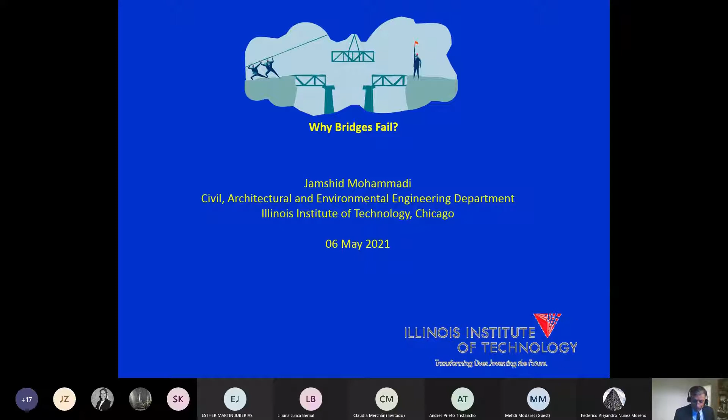So today I'd like to talk about a topic on bridges, and it's actually a down-to-earth type of talk. It's not very scientific, simply I just want to say why bridges fail. Most of this is based on my own observation and research with my students or even myself. So please feel free to comment and ask questions.

Bridges come in many types and forms and make up important components of the built environment and infrastructure system. I'd like to touch upon an overview of different types of bridges in the US, and the types of bridges we use here, based on some studies I did with Federico for Colombian bridges, are a little bit different. There are some commonalities, but some are different. So I thought it would be good if I introduced the different types of bridges in the US, talked about some reasons why bridges fail, went over some examples of bridge failure, and explained methods used to prolong the life of bridges. These are pretty much the contents of my talk.

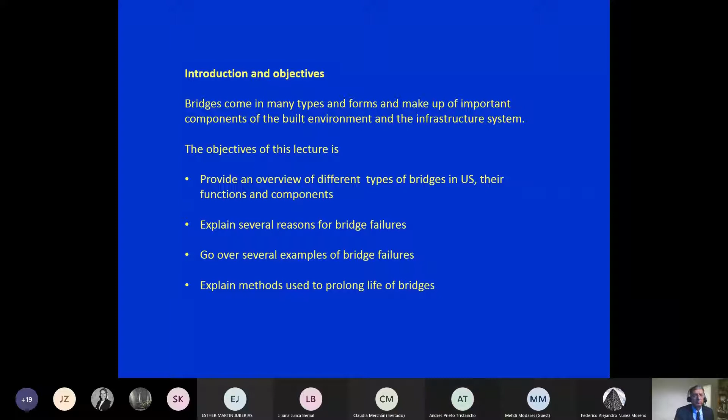When you look at the infrastructure system as a whole, you will notice that under that I put structural systems, environmental systems, and transportation systems. Then you notice that bridges would appear in those red boxes in two places. They appear under a structural system, and they also appear under transportation system. Of course, we know that bridges offer public and private users the level of comfort and operational safety needed to meet the overall objective of the transportation network. When you look at a bridge as a structural system, then it comes under structural systems. However, when you look at it at the network level, then it comes under transportation systems. Of course, the two lower red boxes you see are related to each other, but each has its own area of research and investigation in terms of reliability and also contribution to the infrastructure sector.

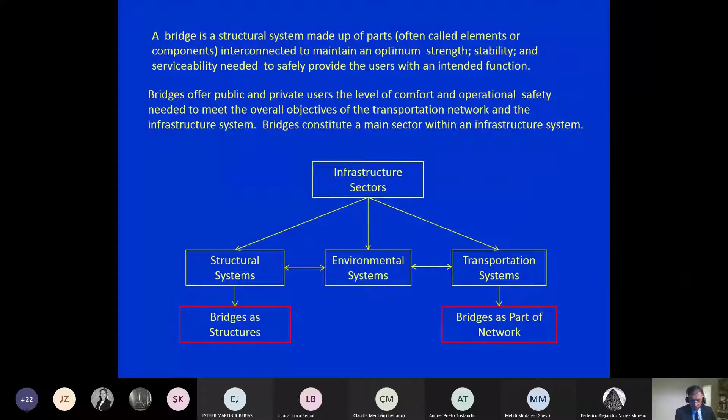So what are the types of bridges in the US? That's a good question. You ask people, and although they think it's a simple question, many people simply cannot answer it. So I decided to come up with an answer: what are the different types of bridges? In a broad sense, they are links in the roadway and railway system to allow traffic.

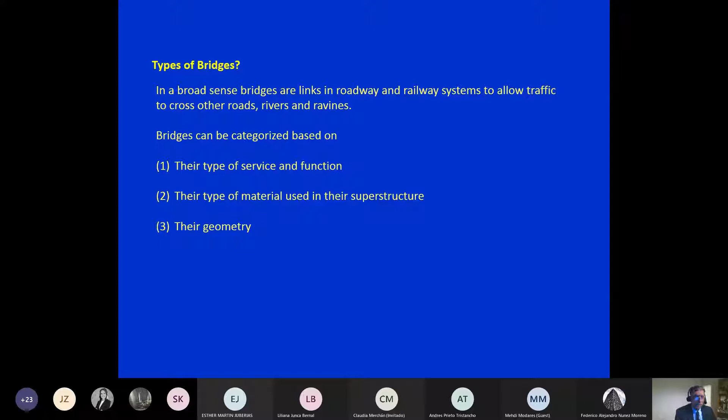Based on that, you can categorize bridges: one, based on their type of service and function; two, based on the type of material used primarily in their superstructure; and finally, based on their geometry. So let's look at some of these.

In terms of service and function, in the US we categorize them as highway bridges and railroad bridges, which are pretty universal. Pedestrian and bicycle bridges we call footbridges. Movable bridges may not be familiar to a lot of people. And in terms of other functions, a bridge may be used for a major oil or water pipe, or bridges used in airports.

So here are a few examples. The lower figure to the left is a railroad bridge, a typical US truss bridge. To the right you find a modern concrete bridge, which doesn't have much in terms of aesthetics and architecture — very common in the US, very flat type of pre-stressed concrete. But at this point we categorize it in terms of the network, so that would be a highway bridge.

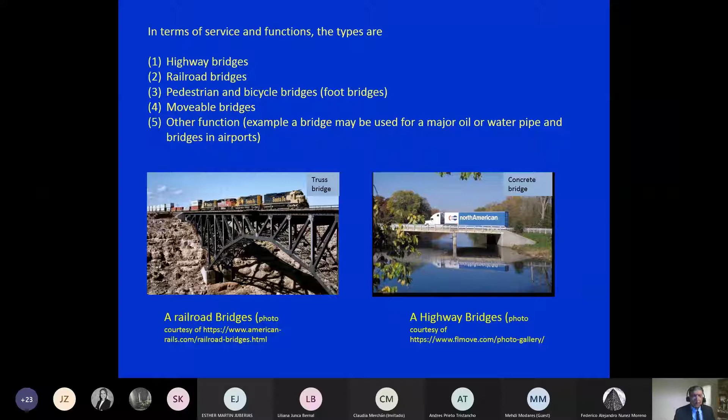To the left is a cable bridge, used as a bicycle or pedestrian bridge. And to the right is a bridge used in an airport. So these are some examples in terms of application or use.

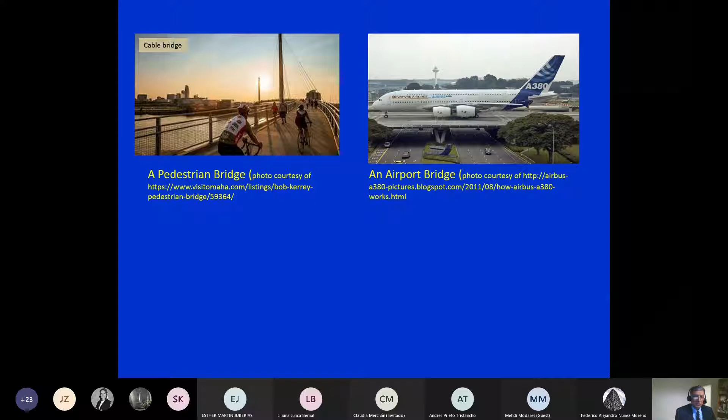Based on the materials, that's a little bit more known to us. However, we have to be careful when we say materials, because the bridge may not be entirely made of the same material — at least a lot of them in the US are like that. So we are referring to the superstructure.

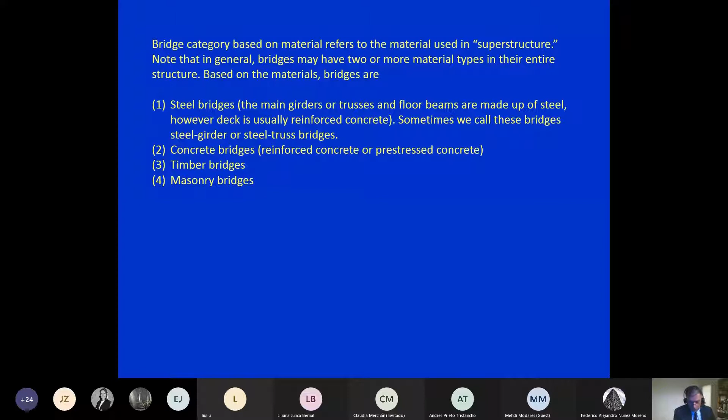In that case, we have steel bridges, and again we're talking about the main girder, because a lot of steel bridges referred to in the US are made with a reinforced concrete deck part — we are talking about the girder part. That could be a truss, or it could be a girder, a plate girder, or a standard W section or things like that. Then concrete bridges are either reinforced or entirely pre-stressed. We have a whole bunch of timber bridges in the US, and we still have a few masonry ones. So these are the material types.

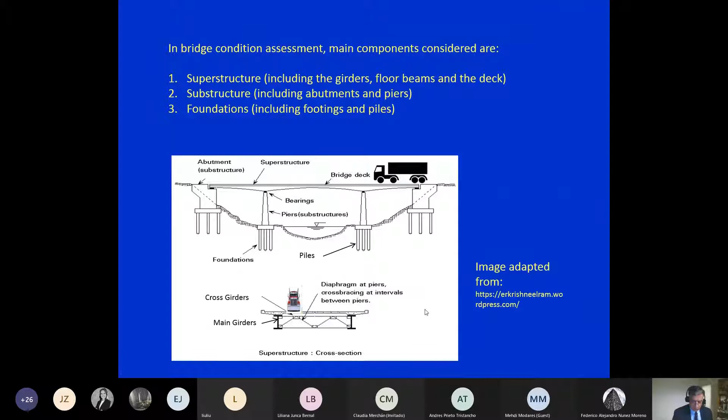So when you look at the longitudinal detail of a bridge, you see those components explained here. And lower you have the cross-section of the superstructure. So I thought this would be good to clarify before we continue.

Now, in terms of geometry, in the US we classify bridges as girder bridges, arch bridges, truss bridges, suspension bridges, cable-stayed bridges, floating bridges — that might be a little new to you. What are floating bridges? And another type that may be new to you, to our Colombian colleagues, is what we call covered bridges and timber bridges.

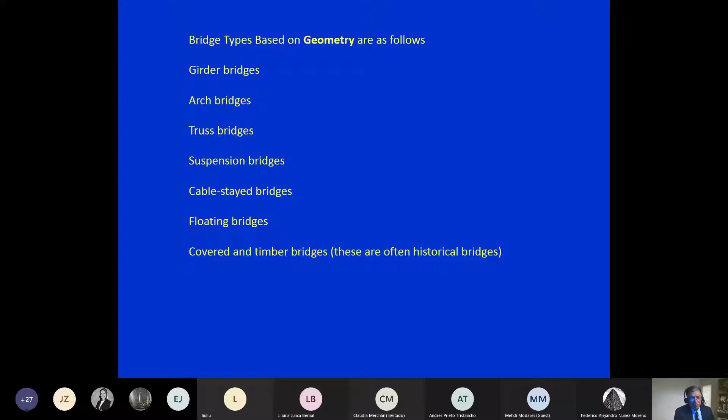Now, these are historical bridges. I'll show you some photos of those — they were primarily built in the Midwest area of the United States, in Indiana, in southern Illinois, around the 17th, 18th, even sometimes into the 19th century. Now they have a lot of historical value, and they are preserved because of that value.

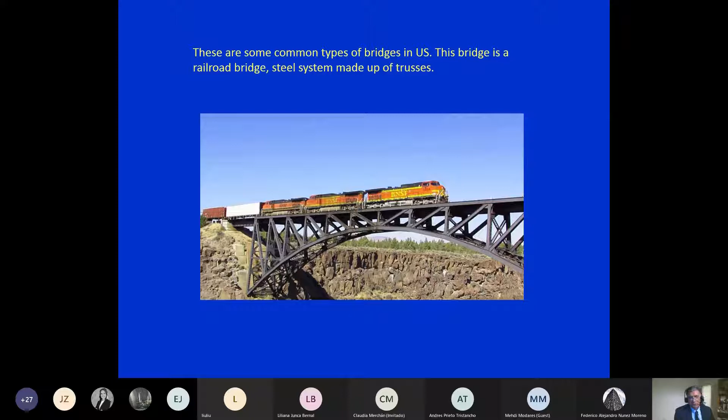So again, going back to the photo I showed you, now you see it's classified as a truss and also an arch bridge in this figure. It's a railroad bridge and also a steel bridge. So you can see it falls into different categories.

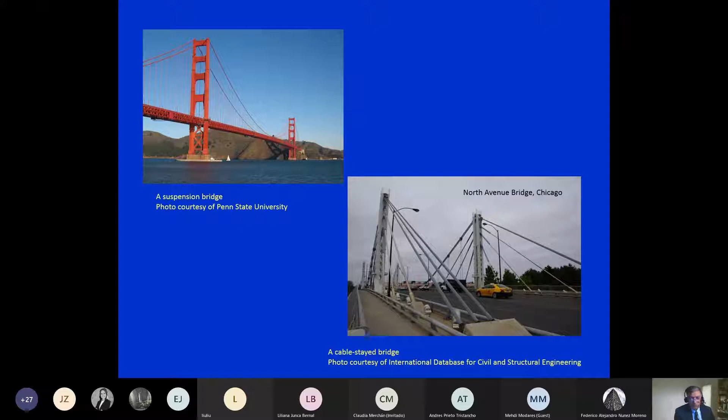Upper left, you find a suspension bridge, as you're familiar with. Lower right is a bridge in Chicago, on North Avenue, and this is brand new. I mean, brand new is about 6 years old, and it's a cable-stayed bridge.

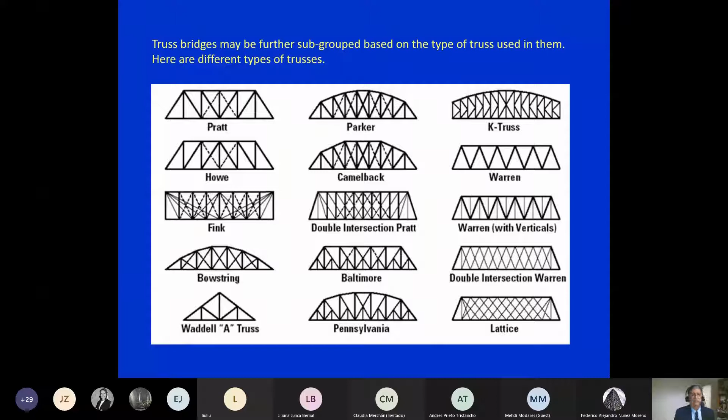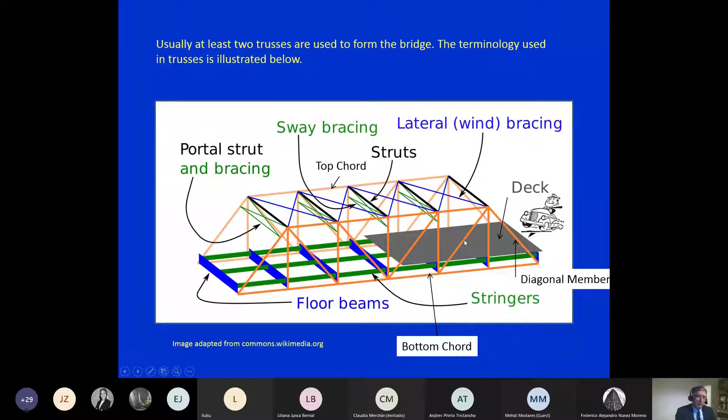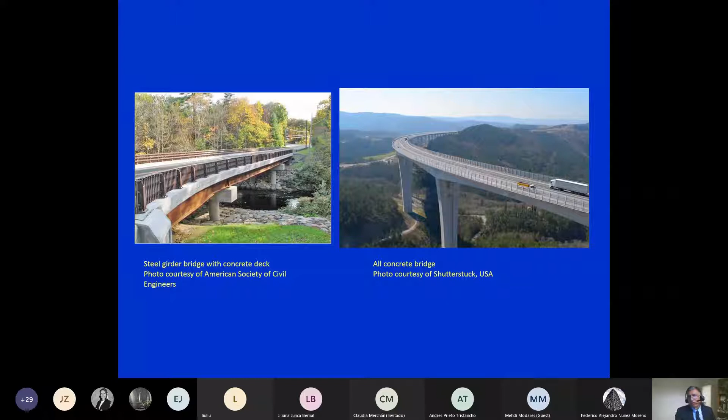Okay, so again, a couple more examples. I intentionally put the figure to the left. This looks like a concrete bridge, but in terms of category, we call it a steel bridge because of the steel girder. The one to the right is an all-concrete bridge, so that is definitely called a concrete bridge.

And these are so important in certain areas of Indiana and Illinois that people even have festivals in the fall semester called covered bridge festivals. So people gather and use these bridges, sometimes even using their old buggies and carts, horse-driven carts and things like that. And they are being preserved, and many of them are considered monuments that need to be protected.

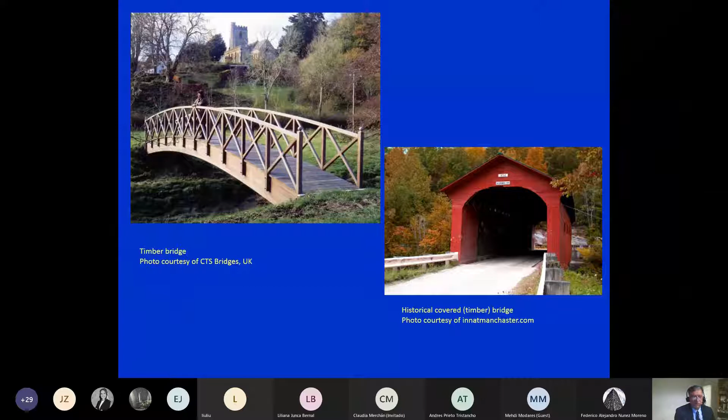So, you may be familiar with some of these bridges. These are stone bridges. Actually, Minnesota, in the US—these are arch bridges using masonry materials.

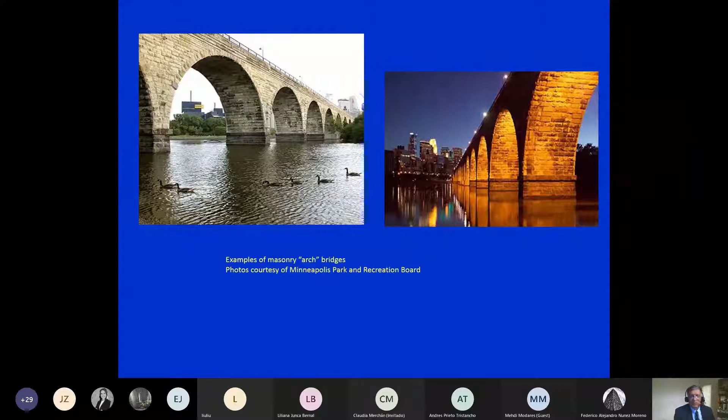Now, this is an interesting one. It's called a pontoon bridge, a floating bridge. And the concept is that you have a series of boxes, practically—you see those red boxes? They are floating, and the bridge deck is built over them. Now you drive over this bridge, you don't even feel that you are on a floating bridge. I mean, they are so stable.

And these pontoons are secured to the riverbed or even a lake bed through some bracings and heavy weights, and they are kept in there. They require a very rigorous inspection program. In this special bridge, these pontoons are made of steel, just like boats.

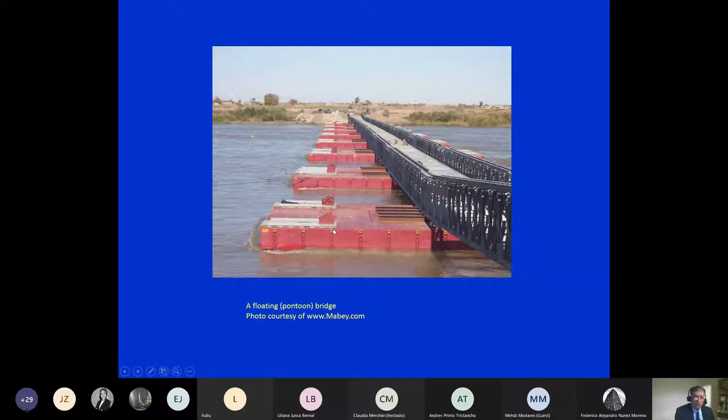But there are 4 of these in the state of Washington in the US where the pontoons are made of concrete. You know, these are concrete boxes. And you go inside one of these boxes, you don't see any cracks. They are pre-stressed. They are done so elaborately, you cannot have any cracks.

The figure you see here is called the Lacey V. Murrow Memorial Bridge. And you notice that in the foreground, it is pretty much like a truss bridge. And then there is a little arch bridge. And then the pontoons start from around this point and continue.

Very stable, nice bridges. Unfortunately, one of these failed, and I was involved in the failure investigation of that bridge. So we called it the cause of failure—why a floating bridge could fail. They are actually very reliable, and the reason for the failure of the floating bridge there in the state of Washington was neglect.

What happened is that these pontoons require that somebody actually go inside. They have a little manhole and a cover. You open it up, you go inside and do inspection, make sure there are no cracks and things like that.

One of the workers forgot to put the cover back. And lo and behold, that night there was a huge storm in the area. A lot of water accumulated in one of those pontoons. It sunk, went down, and took a major portion of the bridge with it.

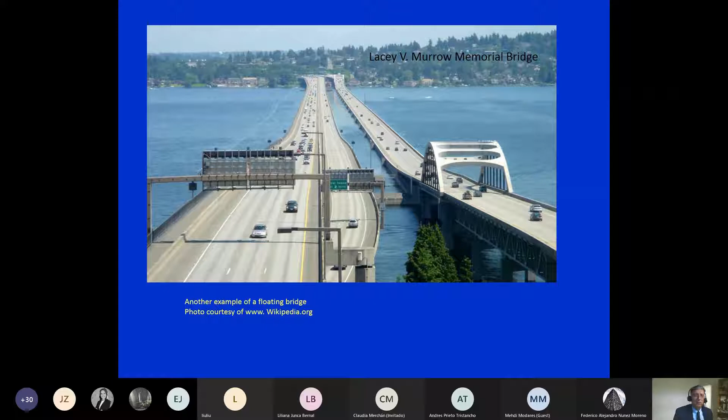However, the idea of a pontoon or floating bridge is not new. The first floating bridge apparently was built by the Persian king Xerxes. Those of you who are Bible scholars and know the Book of Esther know King Xerxes was the king and Queen Esther married him. He conquered Greece in 481 BC, but first his army had to cross the Hellespont Strait, about 4,409 feet, about 1.3 kilometers wide.

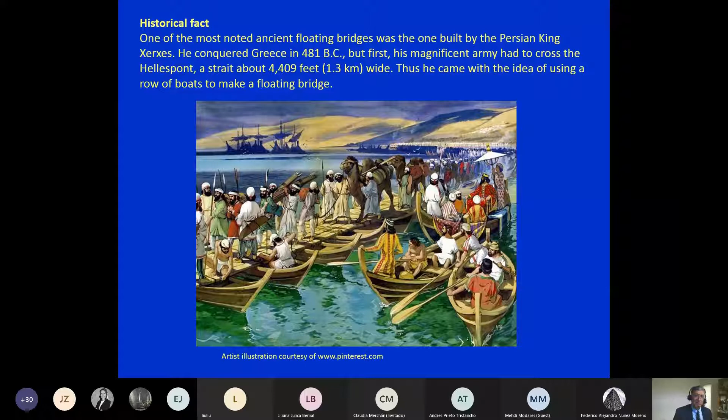So he came up with the idea of using a series of boats to make a floating bridge and pass his army across. This is a pretty famous historical fact. So that kind of bridge has been around for years.

How about movable bridges? Well, we who live in Chicago are very proud of our movable bridges. We are #1 in North America in terms of having movable bridges. These are bridges that open up to allow marine traffic to go through. We have about 45 or 46 of those in Chicago alone. If you visit Chicago, those are among the scenes on the Chicago River around the north of downtown.

At times when the boats go through, they open them up. We call them sometimes bascule bridges. Bascule is a French word meaning balance scale, and these bridges practically follow the same principle as that of the balance scale. So you have a counterweight which balances the span when the bridge is in the upward position. Because of the balance weight, the bridge really requires little force to open it up.

So the mechanism of operation of these bridges is practically unchanged since the 18th, 19th century. I think the largest number of those in any given town is in Amsterdam, so Chicago is like #2 in the world.

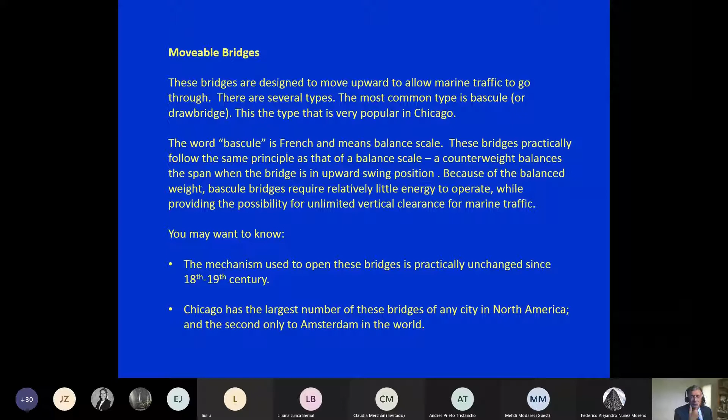You see a very nice photo of what we call the State Street Bridge, which is open, and the marine traffic goes through. If you're driving over the bridge, you have to wait. There's a sign that tells you to stop, and you'll see like a room or an office there. The operator sits in there, monitors, and equipment is there to operate it.

Further down, you see a second bridge. This is called the Columbus Drive Bridge. And talking about failure, this bridge failed—not that it came down, it's very strange—it just went up and got stuck and didn't come down. No matter what they did, the bridge didn't come down. For a period of months, the engineers did a lot of work. This was a failure that was very famous at that time.

It says Chicago is a strange town: when the bridges fail, the bridges go up, they don't come down. That was back in 1991, 1992, around that time. The reason for failure was the equipment was rusty; it didn't get enough attention, and as a result it got frozen up there. So quite a bit of force they had to put together, and they had to do some repairs to bring it back down.

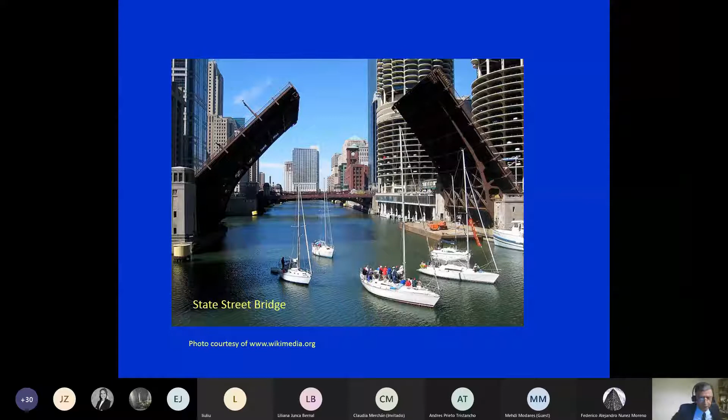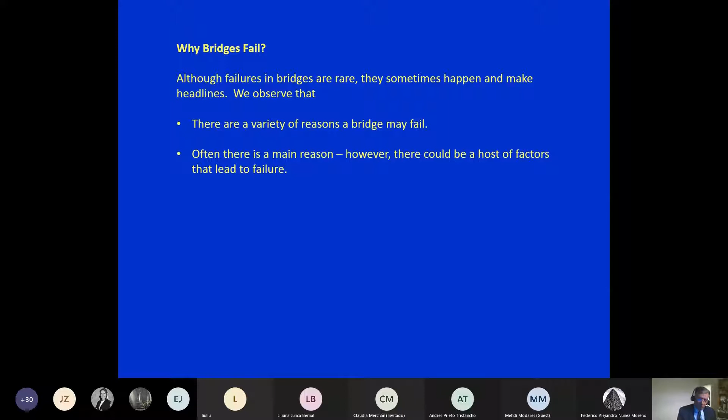So now, why do bridges fail? You saw some examples I talked about. Although failures in bridges are relatively rare, they sometimes happen and make headlines—that's a problem. When a bridge fails, all of a sudden it's a news headline everywhere. There are a variety of reasons a bridge may fail. Often there is a main reason, compounded or superimposed by other factors. So there are always a host of factors, but you can always identify a main item. Here I put 9 different reasons, and there may be others.

Number 1, wear and tear, where structures have reached their useful service life. Number 2, design errors that go undetected. Number 3, hit by a ship or by a barge. Barges are those flat ships that carry primarily garbage and sometimes coal and things like that on rivers.

Number 4, bridge neglected for adequate repairs, rehabilitation, or retrofit. Now, if these terms are a little new to you, what is a repair versus rehab or retrofit? I'll talk about those for clarification.

For a concrete bridge, number 5 can be damaged or deteriorated. Reinforcing bars or pre-stressing wires may be corroded, causing a reduction in strength. I've seen that in some box girder bridges, when the bridge fails, these tendons or pre-stressing reinforcement are pulled out, and sometimes you wonder how much force was there to cause this. I've seen some failure cases that are amazing.

Number 6, fatigue of steel structural members, in the form of a fracture in the metal. Number 7, error during construction of new bridges and during demolition of old ones. Number 8, unusual loads, such as strong earthquakes, storms, hurricanes, fires. And number 9, terrorist attacks.

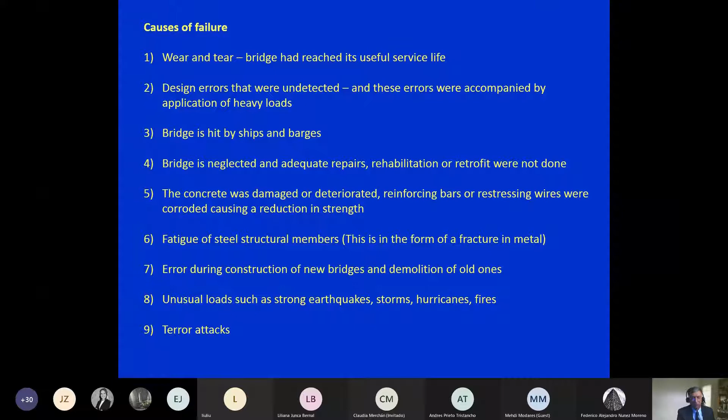As you know, bridge design is done per a standard recommended, at least in the US, by the American Association of State Highway and Transportation Officials, that's for highways. For railroad bridges it's the American Railway Engineering and Maintenance of Way Association, called AREMA. Many types and combinations of load conditions are used, and in the US for highway bridges we use 356 kilonewtons, which is 80,000 pounds, as a standard load for bridge design.

For railroad design, we use a sample train called a Cooper E80, which is a series of concentrated loads with some uniformly distributed load. You put it on a bridge and design accordingly. There are also a variety of other forces you consider for design. But although there's always a margin of safety in design, if a structural member is not designed appropriately and some unusual load occurs, the bridge may fail.

So the question is, is this a common cause? The answer is no, it happens very rarely. And if it happens, it is probably accompanied by other factors such as heavy loads.

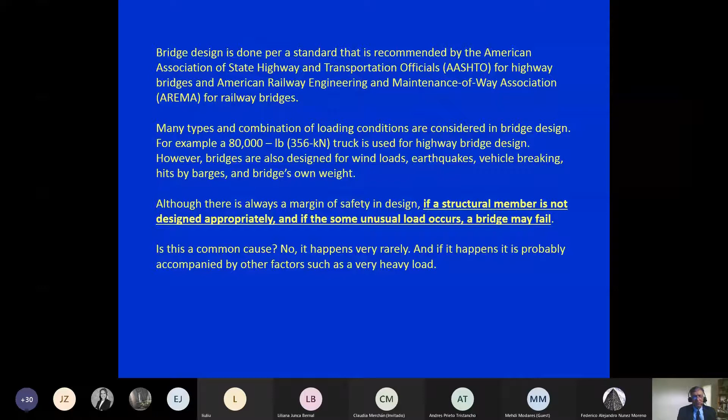Let's look at an example of a bridge failure. Some of you may remember this: Interstate Highway 35 West, August 1st, 2007, Minnesota bridge failure. This bridge crosses the Mississippi River, had 8 lanes, a steel truss arch bridge that carried Interstate 35 West across the Saint Anthony Falls of the Mississippi River, close to Minneapolis, Minnesota. The failure happened August 1st, 2007, killing 13 people and injuring 145. The bridge opened back in 1967 and was Minnesota's fifth busiest, carrying 140,000 vehicles daily. Cause of failure? A design flaw caused the collapse.

However, this was accompanied by periodic application of the load, so fatigue was also contributing to that. The funny thing is that this bridge was inspected before it failed and nobody detected this flaw. It's a gusset plate that, when you look now at the photos before the failure, you could suspect something was wrong with it. It actually ripped along a line of rivets, and the additional weight on the bridge didn't help either, and as a result, the bridge failed.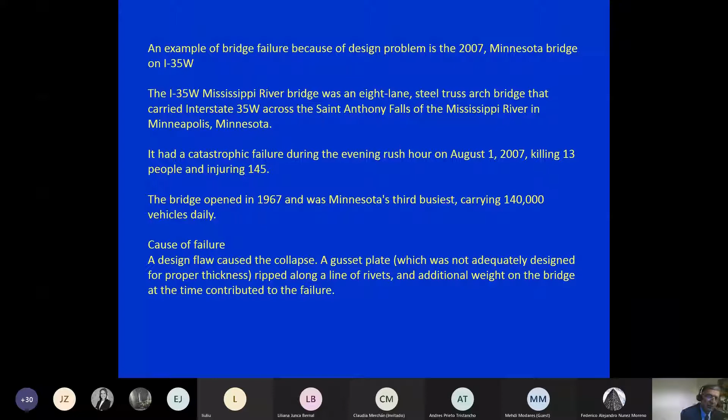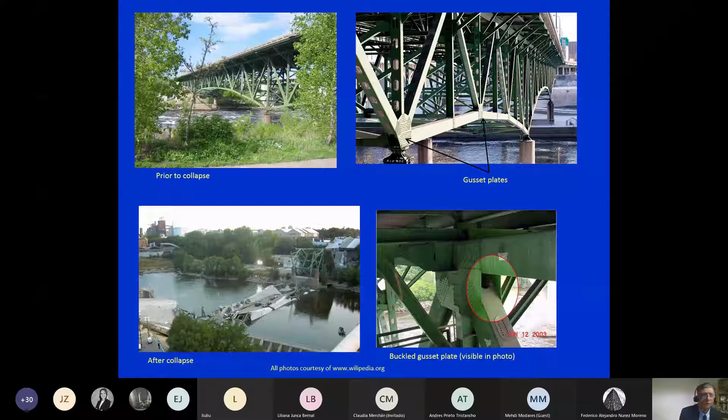Another cause of failure, extreme load, hurricane in this case. Hurricane Katrina, back on August 29, 2005, caused the failure of this bridge over Interstate 10 in Louisiana. It was a twin span bridge called the Frank Davis Memorial Bridge. You can see some of those elements or components have been displaced, causing the failure of this structure.

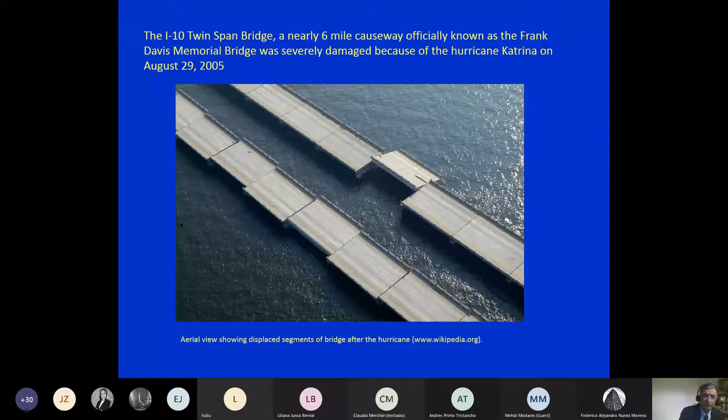The lack of proper repair, rehabilitation, and maintenance is another cause of failure. I highlighted this in the abstract of this talk because this is among the most recent bridge failures. The 50-year-old Morandi Bridge in Genoa, Italy, August 14, 2018. Some of you may remember that. It was a major bridge failure in Europe.

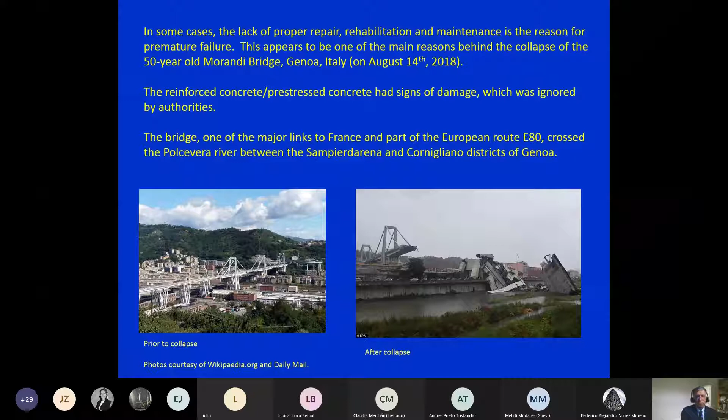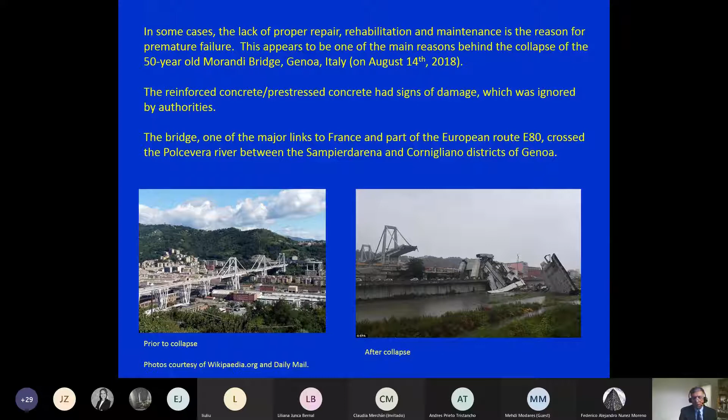The reinforced concrete, pre-stressed concrete had signs of damage, which was ignored by authorities, although there were several warnings of this. The bridge is one of the major links to France and parts of the European Route E80, and it is in the district of Genoa in Italy. You see some prior collapse photos to the left and after collapse to the right. That bridge was definitely lack of maintenance, proper attention.

But before I move on, I thought I'll bring up some definitions here because it would be important for my next slide. So when we say maintenance, what are we talking about? This is a scheduled inspection intended to make sure the system has no problems and it functions properly. So that is what maintenance is called.

When we say repair, it's a series of minor replacements or changes in the system to maintain its intended function. If you do not do these changes, the system is still okay, but not very efficient and will deteriorate fast. So this is a condition we call functionally deficient if you ignore repair. Functionally deficient.

Rehabilitation is a series of major replacements and changes in the system to bring its function to an acceptable level. If you don't do these things, the bridge is not failed, but it's called functionally obsolete. That means you really should not be using that bridge.

When we use the word retrofit, this is a series of changes that would improve the system function and bring it to a higher level to meet new demands. This is different from rehabilitation because you make the changes, you make all the replacements, but the function itself changes. A good example is to retrofit a bridge so that it would be able to take care of seismic earthquake loads.

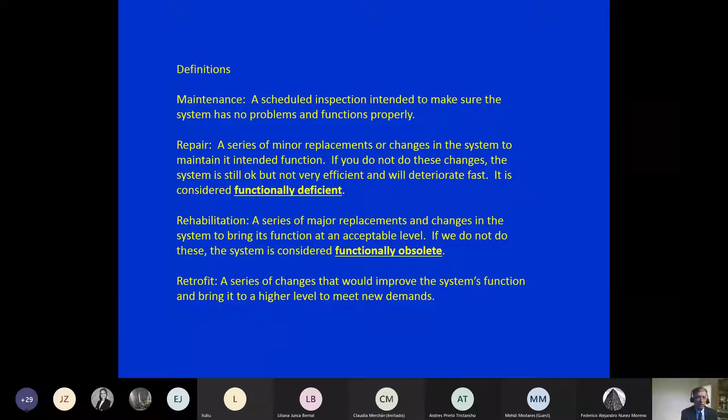In southern Illinois, many bridges are going through this process because when they were designed, we did not know that southern Illinois is a major earthquake area. Now that we know, they are rapidly retrofitting these bridges to make sure that if an earthquake comes, they will be able to sustain the load.

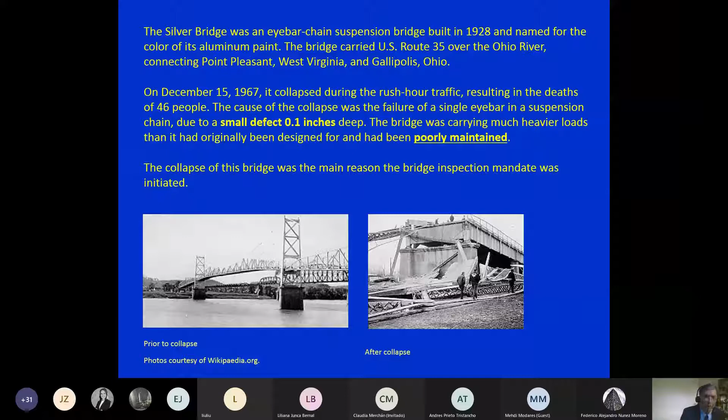Back in 1967, because of the collapse of this bridge, the United States mandated inspection of bridges once every two years. So every highway bridge in the United States must be inspected once every two years. That started back in 1967. Lyndon Johnson was the president who ordered that to be done, and it went past Congress quickly. So, metal fatigue.

Metal fatigue is another cause of failure, and this mode often happens in structures that are periodically subject to loading and unloading, and bridges are examples.

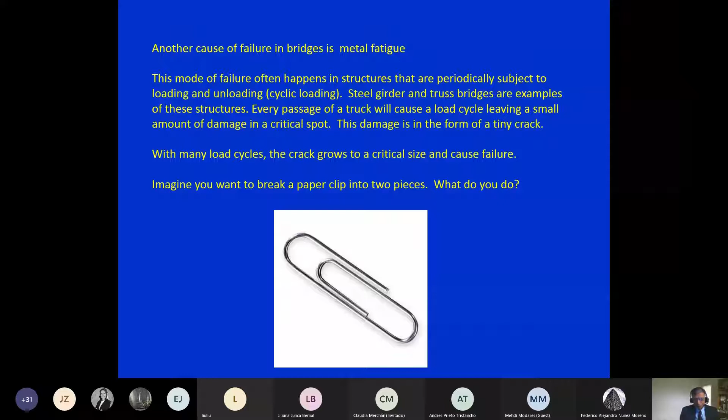You're familiar with fatigue, but I always bring up this paper clip example. If you want to break a paper clip, what would you do? You just bend and unbend, bend and unbend. You put enough stress in it that you break it. Of course, in bridges, we do not stress structural components that severely—we don't stress them beyond the yield level.

Here is an example of cyclic loading when your loading goes well above the yield. You have a little bit of permanent deformation, epsilon1, then next cycle epsilon1 plus epsilon2, etc. Eventually you reach epsilon u. Beyond that, you break, and this is an abrupt, brittle type of failure.

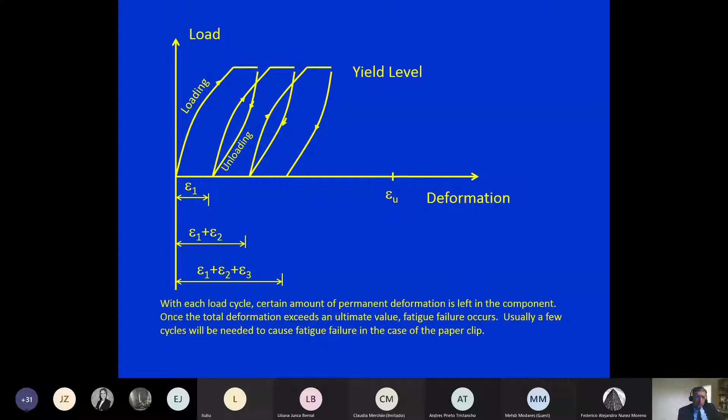In highway bridges, we have done some tests on Illinois bridges. Actually, the stress for most bridges is hardly 27 to about 34, 35 megapascals.

It's not that high. When a truck comes—you see an example of most of the truck traffic in the US, this is an 18-wheeler, 5 axles, 80,000 pounds, which is 356 kilonewtons total weight.

That's the major portion of truck traffic. One of these goes over the bridge, you see a rise in stress, and it comes down. The amount of stress you see, the maximum—sometimes we see isolated cases of going higher than that. But of course, the level of stress also depends on the speed of the truck. We're talking about 55, 60, about 80, 85 kilometers per hour.

Why is the speed of the truck important to the stress level? Because of the road roughness. The faster the truck goes, it's more like having a higher frequency of the load—the frequency goes up, and as a result you get higher stress levels. But the ones we measured in Illinois for most steel girder bridges were hardly 35 megapascals.

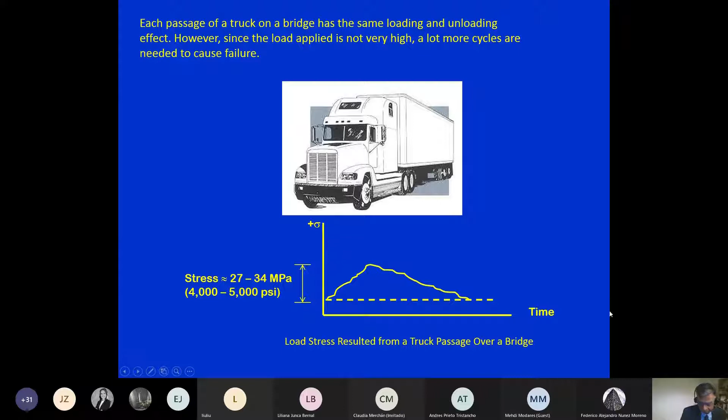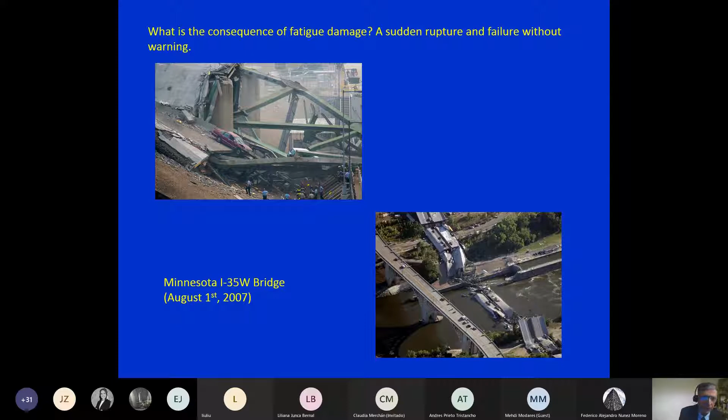So what's the consequence of fatigue failure? It's an abrupt failure, a brittle failure. It doesn't give any warning. The only way you can prevent it is simply by periodic inspection, by careful inspection, looking at the critical sections. Most critical sections for fatigue are welded components.

And in the US we use a detail—I didn't show the detail here, but what we use is called the cover plate. It's welded at the bottom of a flange of a steel girder, and that's where the fatigue usually starts.

So let's look at some examples of bridges, some very recent and one very old.

Florida International University, you guys might remember that, a pedestrian bridge collapsed during construction on 15th of March 2018. It was a concrete bicycle pedestrian bridge connecting two parts of the campus, a beautiful bridge built using a method called accelerated bridge construction. The cause of failure, I still haven't been able to find the report that gives exactly what it is, but my own idea is that they rushed into finishing this bridge. They were using a lot of publicity about how beautiful it was and how effective this accelerated method was. I think they rushed into opening the bridge, or at least removing the forms, because it came down pretty much under its own weight. There wasn't any extra load on it. Unfortunately, there were students and people in traffic in the underpass, and some of them lost their lives.

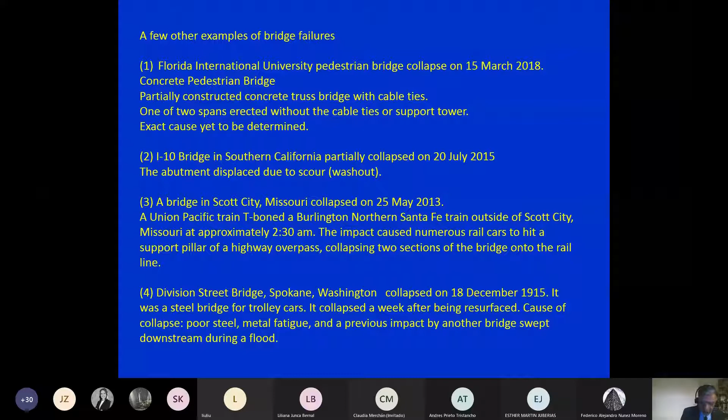Now, this is an important failure, the Quebec Bridge, in Quebec City, Canada. I always bring this as a case study to my students, especially when we talk about ethics. This happened on 29 August 1907. It was being built using what we call a cantilever system, meaning two parts of the bridge start from two ends and then lock together in the middle when completed.

The reason for collapse was nothing but miscommunication among different parties. I mean, miscommunication doesn't cause a failure by itself, it was overloaded conditions, but this was detected by a junior engineer there. He continuously used telegrams to tell the designer, Mr. Theodore Cooper, who was a very prominent bridge engineer of the time: 'Mr. Cooper, please come over and look at it. To me this bridge looks overloaded, I see these cantilevers vibrating very vigorously. What am I supposed to do? Should I stop the construction?' The telegram came back: 'I have so much confidence in my design, proceed, you don't have to stop construction of the bridge.'

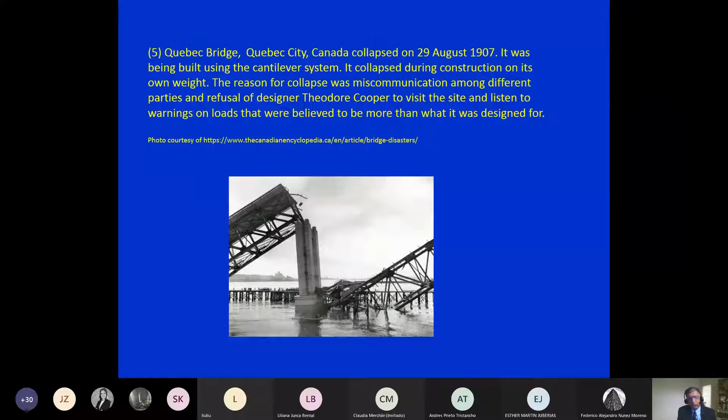So this miscommunication continued, and at one point Mr. Cooper decided not to even answer anymore. The bridge unfortunately collapsed and caused many lives lost. We bring it up as a case of ethics. Mr. Cooper did not design any bridge after that, he was under so much stress after that failure.

Anyway, how can we prevent failures? Certainly proper design is important, proper quality assurance at the time of construction, paying attention to details, good communication between all parties, and this is very important: periodic maintenance and repair as needed. This is especially important for bridges that are exposed to weather and may be subject to fatigue and corrosion.

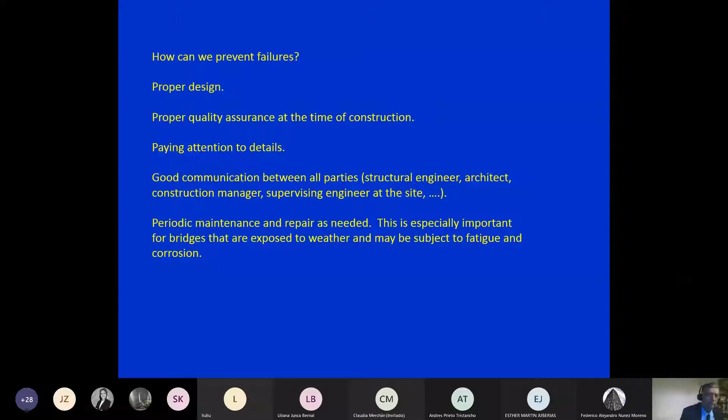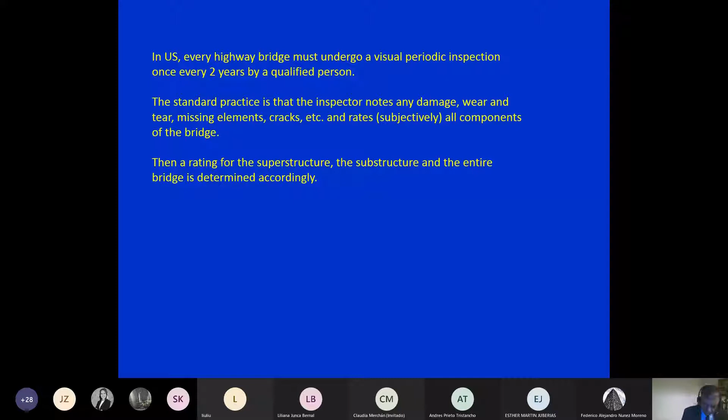In the United States, every highway bridge must undergo a visual periodic inspection once every 2 years by a qualified person, a trained person. The standard of practice is that the inspector notes any damage, wear and tear, missing elements, cracks, etc., and rates the bridge. We use a sort of rating for the components and for the entire bridge, including ratings for superstructures, substructures, and so on.

The Federal Highway Administration uses 10 levels of rating. If the inspector finds the bridge is absolutely in excellent condition, they give a rating of 9, and then you go further down. For example, 4 means poor: advanced section loss, deterioration, spalling, or scour. And if they give a rating of 0, that means the component has practically failed. When we use these ratings, we integrate them to come up with a rating for the whole bridge or segments of it.

Usually, if it is a rating of 4 or below, we just do not trust that bridge. We have to do major work for that bridge.

Other agencies like railroad people do not use these. They use either 4 or 5 categories, but very similar.

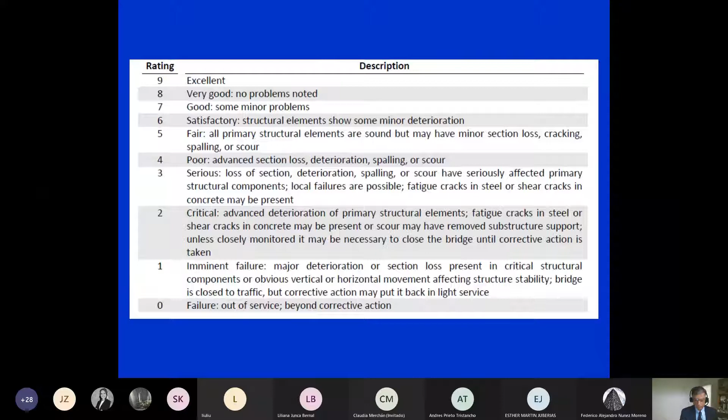So we did a research study because these ratings are subjective, right? You send somebody who goes and writes a note. So we were wondering whether this is reliable, because sometimes you send an inspector and he gives a rating of 6. The next year, the same component, but a different inspector will give a rating of 8 or 7. So we have this discrepancy, but very interesting.

We looked at so many years of data. A couple of students of ours and a colleague of mine, Professor Arditi, and myself did this study. We noticed that really these ratings do make sense. They pretty much show the deterioration of a bridge.

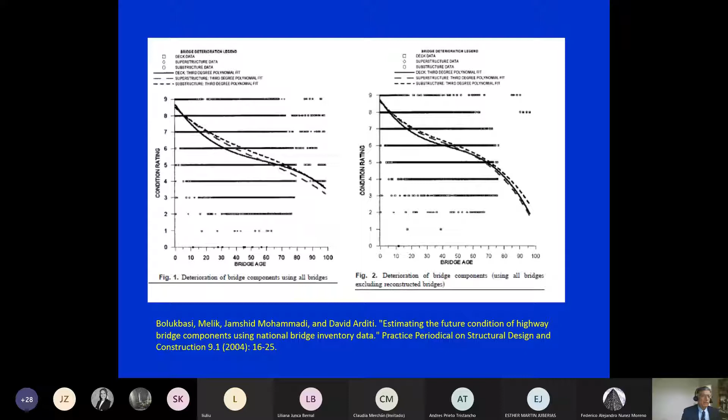Accompanying the visual inspection is another method called analytical rating in the US, and that one is done by computation, calculations. The equation is fairly simple: you use the capacity, deduct from the capacity the dead load effect, divided by the live load, and when it is accounted for, the dynamic effect. So that's the general equation.

If the rating is smaller than 1, it means the component is not acceptable. You can do this for bending moment, for shear, for fatigue. And then you can also have 2 categories, operative or inventory, for the purpose of everyday use or for purpose of record keeping. And there are actually very famous programs available in the US called PONTIS, which means bridge, of course, in your language.

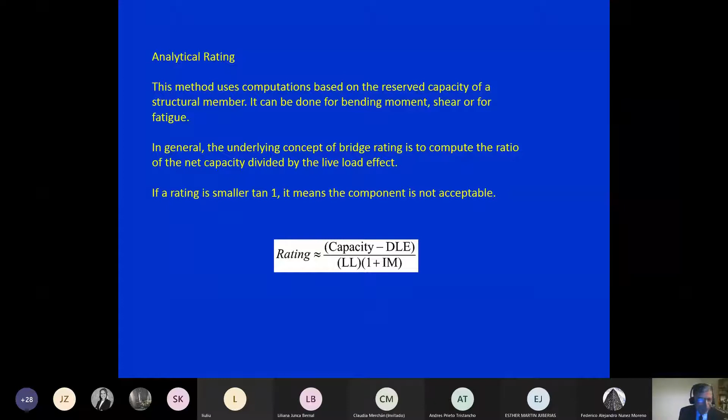Nowadays, we use the method called load and resistance factor rating, LRFR. So the equation is pretty much the same, it's expanded. Rather than capacity, we use a C. We use a series of load factors as shown with gamma. The dead load is divided into 2 parts.

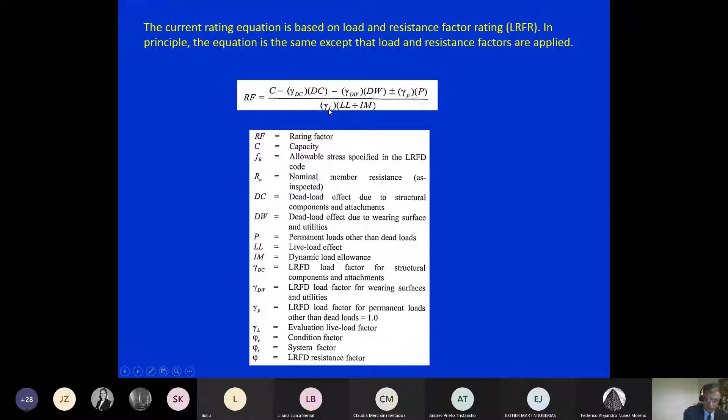DC is the dead load effect due to structural components. DW is due to the wearing surface. And then you might have an unusual load, plus or minus, because sometimes it's upward, sometimes downward. But the denominator is exactly the same, except that the load factor is applied. So this is the equation which is now used.

We actually did a study trying to correlate visual inspection with analytical inspection. There is no linear correlation. However, through some advanced method like fuzzy logic, we were able to find some correlation between the analytical versus the visual inspection ratings. Anyway, load testing.

Load testing is also becoming very popular. It is another way of understanding the condition of the bridge. Bridge load testing is used for condition assessment. It is, of course, costly, requires money, and we do it in situations that really require this kind of testing. Usually a truck of known weight is brought to the bridge, and using sensors, stresses are obtained and used to determine the capacity of the bridge. So in principle, it's very simple.

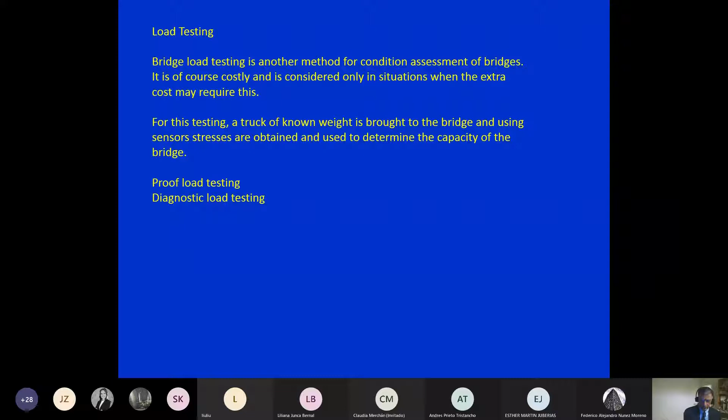There are two different types of testing: proof load testing and diagnostic load testing. So what are these two? Proof load testing is used to demonstrate that a given bridge can carry the legal truck load prescribed by the code in a safe manner. So a truck of a weight equal to the code, for example, 356 kilonewtons.

You bring it to the bridge at a given speed, usually 30 miles per hour, which is about 50 kilometers per hour. If the bridge can carry this load without signs of distress, of course you do a complete inspection, then you have rated the bridge. So you know that the capacity of the bridge cannot be lower than the weight of that truck.

Diagnostic load testing is more involved. It is more expensive. You need to put sensors on the bridge in different structural components.

Again, you bring the truck, you pass it over a known weight, and now the sensors tell you exactly what level of stresses you have developed. Usually you use this method to calibrate the rating equations and make sure components are not distressed. So if you want to know the cost, usually anywhere from $20,000 to about $150,000, that would be the cost in terms of labor, sensors, and closing the bridge to traffic for doing one of these tests. So it's pretty expensive.

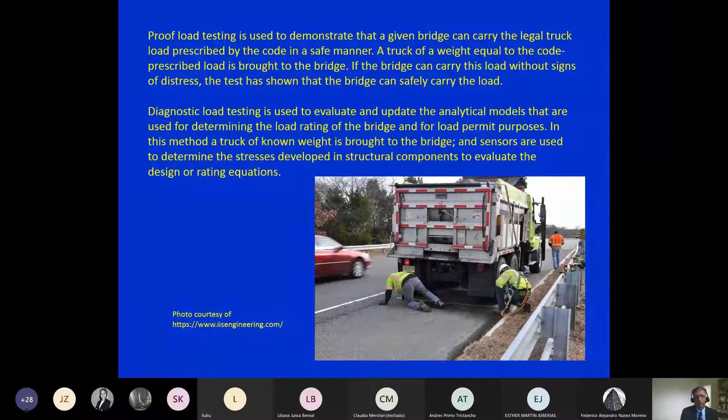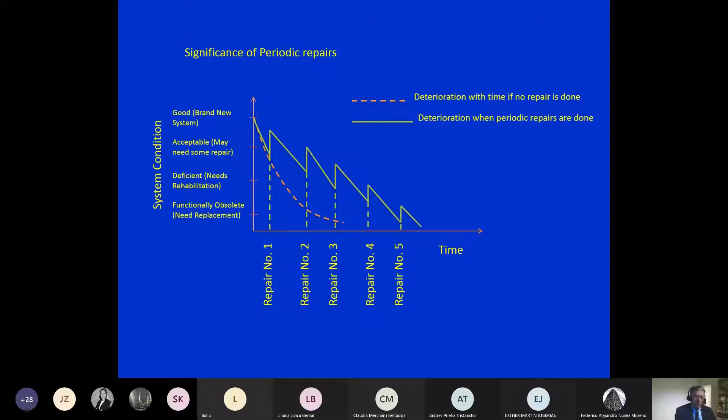So going back to that diagram again, now you understand it better. I intentionally put it back again. This kind of diagram is very, very important, and this type of information we are now using to predict and optimize when would be the good time to do repair number 2 or number 3. Through optimization by timing of this repair, a couple of students of mine and a colleague, Mr. Guralnick, we did studies and were able to even minimize the cost of repair, prolonging the life of the bridge systems.

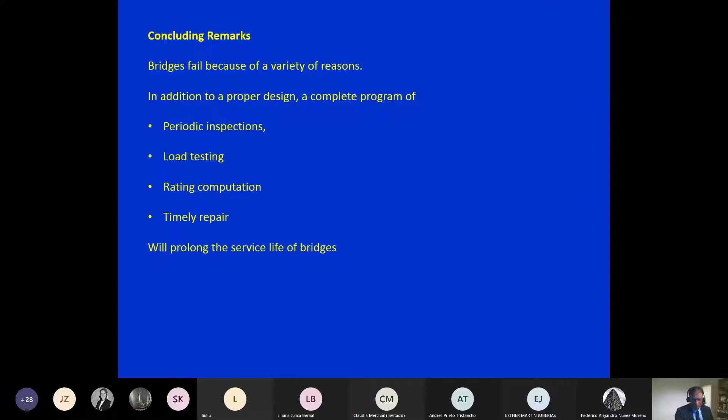So in conclusion, we're right on time, we have about maybe 8 minutes for questions. Bridges fail because of a variety of reasons. In addition to proper design, a complete program of periodic inspections, load testing, rating computation, and timely repair will prolong the life of bridges. Thank you so much for listening, and I'm happy to answer any questions.

And of course, Federico, you have to help me if the questions are in Spanish.

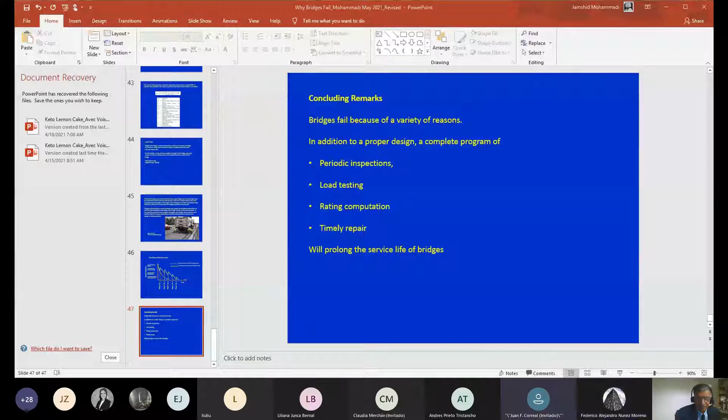Do you hear me? Yes, sir, we can. Okay, hi, it's nice to see you. I think we met a couple of years ago here in Bogota. So it's good to see you, Professor. Yeah, I remember. Well, we are actually working together with Universidad Javeriana on a very interesting project regarding the development of a bridge management system that incorporates a lot of things that you are saying. So it's very helpful to hear all of this, because it can help us understand what the US is doing and what we can implement here in Colombia.

So I have a couple of questions, and I made this short introduction to let you know that we are doing that, and my questions are in that way. The first question is regarding inspection. In the inspections of bridges in the US, you said it's every 2 years. Correct, and they have qualified people to do that. Here in Colombia, we are in the process of having this system, and one of our ideas is to do very quick inspections that let us know when we have to do more detailed inspections. So since our resources here are much less than in the US, this is one of the ideas we have. What do you think about it? Is this going to be possible?

Yeah, actually this has also been thought about in the US, because again the main reason is lack of resources. You're talking about 600,000 bridges in the US, and in the state of Illinois alone we have 35,000 bridges to be inspected once every 2 years. It's involved, but because the law requires it, some states actually do this, and it's very similar to what you're saying, Professor. They look at it and say, okay, we don't see conditions have changed, so they defer it for the next 2 years. That has been, to a certain extent, effective. You have to rely on the expertise and experience of the inspector, and usually these are experienced inspectors. They look at it more like a cursory inspection, but they do it a lot more in buildings. There's a parallel in building inspections for facades, where there's a rule that you do a cursory inspection, simply looking with binoculars, and if everything is good, you postpone it for another 2 years. But in bridges, it's done not formally, but sort of informally by some states. They have been doing it.